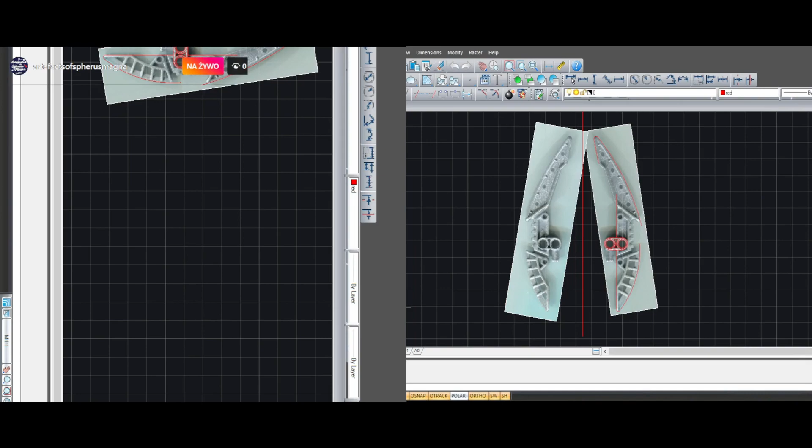Hello everybody. For today's stream I have planned to model this Takanuva part that you can see on screen. This time I'm a little better prepared than the last time we did a modeling stream. I have a camera setup, and when I need to show you something on the part, or if I want to show you how I take some sort of measurements directly from the part, I will be enabling the camera.

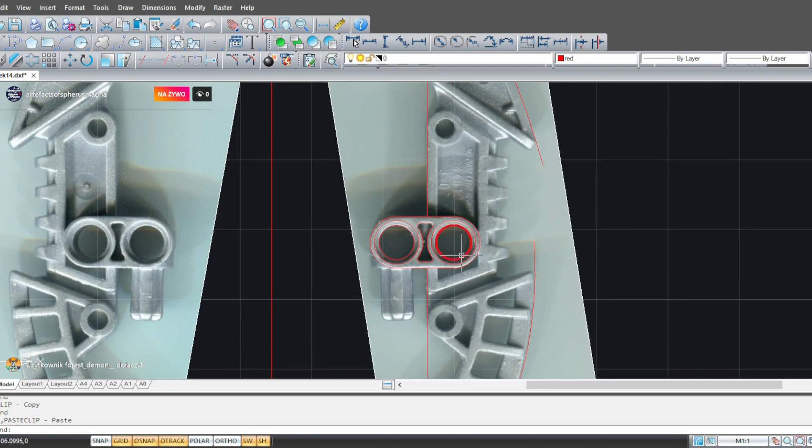Fortunately, this side came out very well. We don't have this sort of distortion. You can see that all the walls are perpendicular to the scanning glass, and we can actually use this reference. So the entire scanning process, making reference process, requires you to be very precise, very diligent, looking for this sort of things, and the perfect way is to avoid making bad references. But when you accidentally make bad references, you have to either remake it or be aware of it while drawing to not introduce some sort of error to the model you are making.

So we'll be mainly basing our reference on this scan, and using this scan only to look for some minor differences between two sides, but I don't think we will even need this side. Okay, so we know that these two lines are parallel, so we can draw this freehand like that. Okay, we have a closed profile here. Let's cut off here like that.

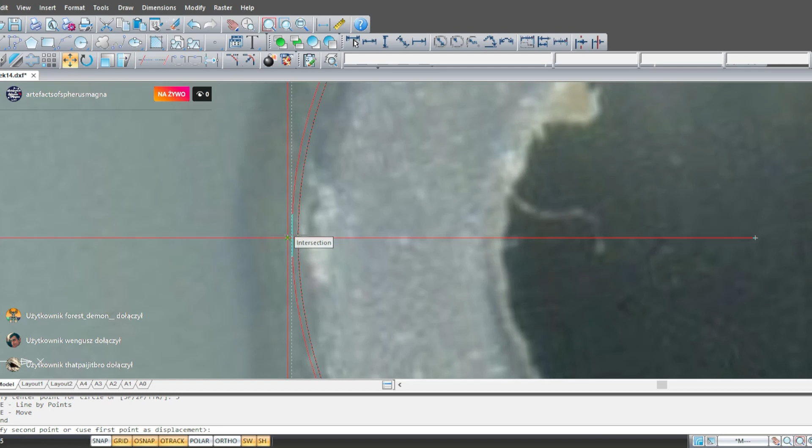First, let's measure it and find the rough position right here. Now we want the circle to be tangent with this line, so we can slightly move it. Again, doing a little hack job because of lack of commands that would let me do it the perfect way. But on this scale, this kind of precision is perfectly fine. Now we need to, okay, I think this arc will also touch off on the point where this line and also this line cross.

Actually, let me look at the part real quick. Okay, so this arc is indeed tangent to this line. It also touches off on this edge, so I was correct there. Also, I can touch off the part on some flat surface on this edge, and I can see that indeed this edge is moving away from the reference, so I can also confirm it this way. Okay, this section is a little thinner. Okay, let's get back to our program.

So let's draw this arc roughly. It goes about, actually, if we make this line first, we will have the connection point. Okay, like that.

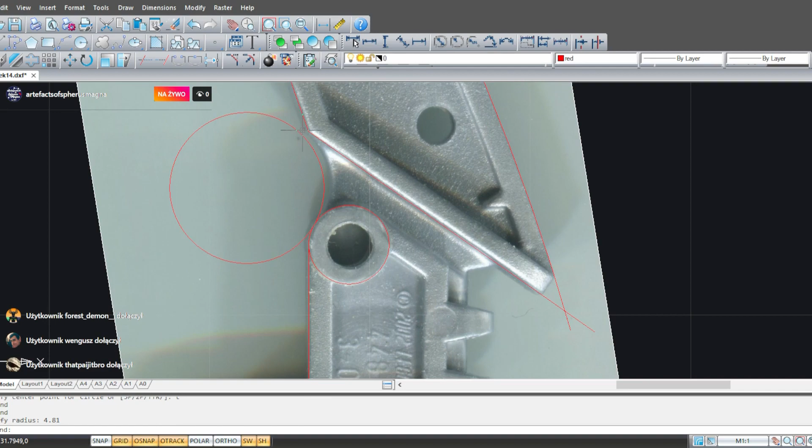It's 4.81. So let's delete it, and now do the tangent, tangent, radius circle, 4.81. Yeah, that's the problem with doing it this way. It doesn't always work. How to do this? Good thing that this arc isn't in tangent with this line, because then it would be an absolute nightmare. But with it going through the point, it's also pretty difficult. How to do this?

3 points, center, start angle, central angle. Start and radius would be useful here. And unfortunately, nanoCAD is sort of limited with this sort of thing. I think we will have to sort of cheat on this being tangent here. Again, on this scale and with 3D printing, it won't be even detectable.

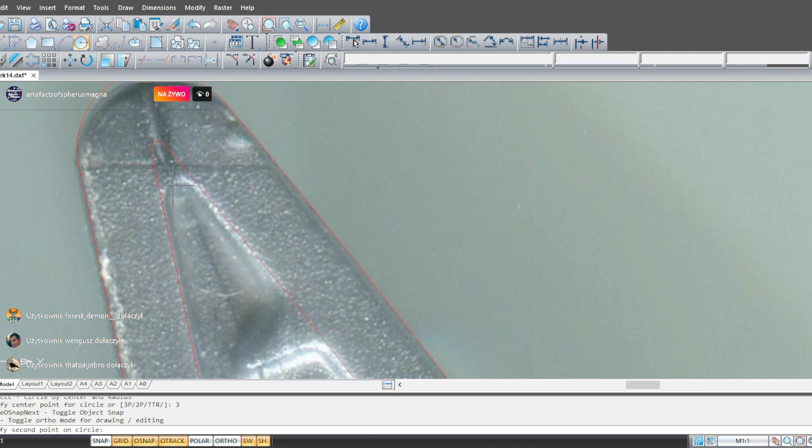What's the radius here? I can see on this background 0.4. So let's do fillet 0.4 here and here. Okay.

I also have a lamp set up for the camera, so you can see the part and the calipers, and the lamp shines on my monitor, and it makes it kind of hard to see.

Do we need some sort of radius here? Not really. So we can leave it as is. Cut off here. Actually, this stays. Okay.

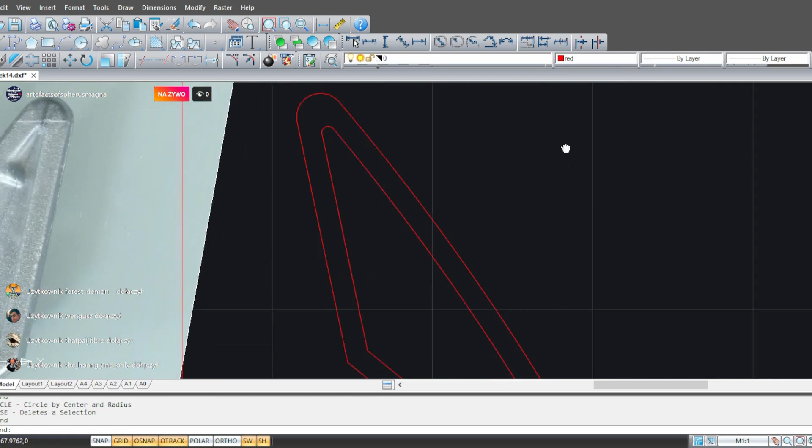AutoCAD had this sort of thing that when I moved the view, I think it was because of the memory running out, the picture would vanish, and I would see only the lines as long as I drag it from side to side. And it was really useful to see the lines without the background reference. So it was sort of a bug, but I learned to use it to actually check if all the areas are outlined and if I have everything. The only way to do this in this program is to delete the picture and then go back.

So we have to do the teeth and the holes in this blade. I will be skipping the ejection ports from the molds, so let's maybe do the holes first. Are they on some sort of a curve? Those three look like they are. I don't know about this one. Maybe let's see. Center. Oh, it actually worked. Interesting.

Okay, so they are on the arc that is concentric with this edge of the blade. Okay, so we just need to pick up the radius of this arc, and we will do this by finding the center of this first circle. Okay, right here, center of this, like that.

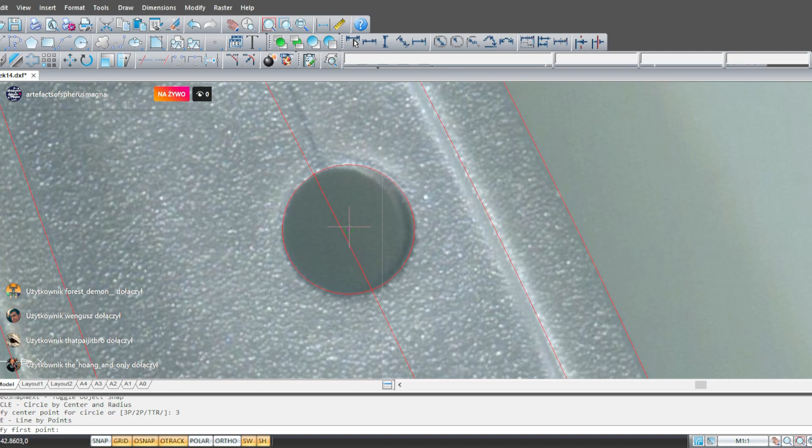We are interested in the circle in the center only, and we don't need the diameter of this hole. So let's find first the center of our arc, and now we have a point where those two cross. We don't need these two. Now if we take this circle, ensuring that they are both the same diameter, we can move this here.

Now we know that the angle between these two is twice as much as we need the angle between every object in this array to be. So we can cheat with, again, finding circle center.

Center. So here, center. Here, and now if we find the center point between these two, we don't need this, we extend this, and now we have our third position for our object. So we move this here with only 4 holes being there.

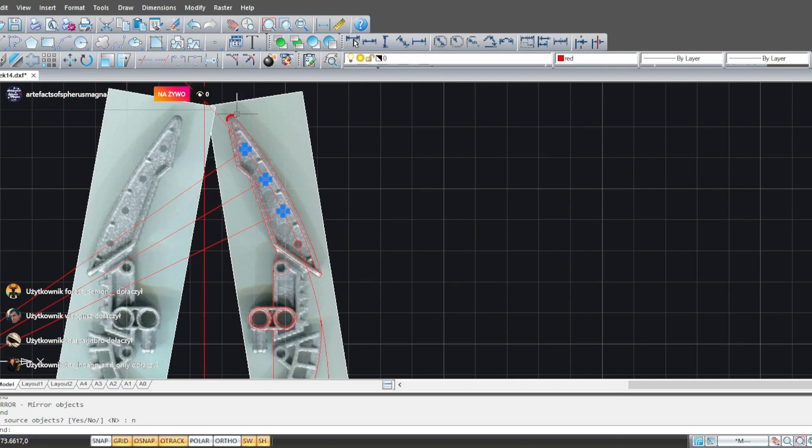On the same arc. So with this method, once it's all set up, we can draw a lot of the objects in the array pretty quickly. But we are done with this array, so we can delete all this helping geometry.

Wait a minute, let's back up, because the teeth are also on this arc, and they look to be in between those circles. So we can use the previous array to make this a little easier. Let's see.

Okay, what shape are they? There's a triangle with a rounded off tip. Looks like those sides are straight. There's a little fillet here, but I don't think I'll be drawing it. Maybe I will, let's just see. Okay, so let's start with one side.

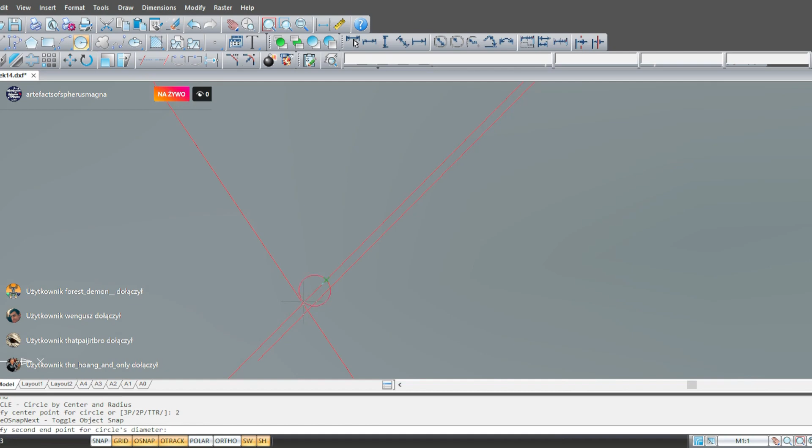It's genuinely amazing. Oh come on, why can't you? Oh okay, I see what's happening here. What? Stupid program.

Maybe like that, from here to here. What was it? It's 0.00, I'm looking here at this value. It's 0.0008 millimeters, so it's 0.8 of a micron. It's amazing. Okay, so I won't be actually finding the difference between them, I'm going to treat them as the same line.

For reference, for those who are unaware, I think the thickness of human hair is a few microns, or actually let me Google that real quick. Thickness of human hair: 70 microns, so 0.07 millimeters. And we got 0.8 of a micron. So 70 divided by 0.8: the distance between those two lines was 87 times smaller than a human hair.

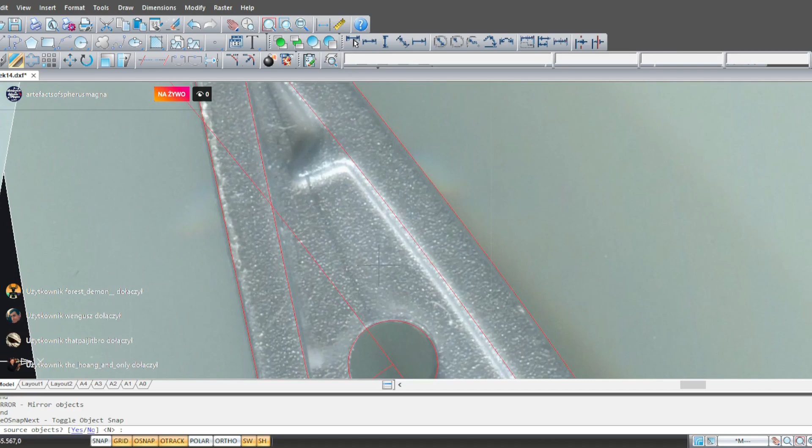Okay, so with this tooth being drawn, now I can actually show you the mirroring of the objects. So we take this tooth and now we can mirror it just like that, and it's in place. And now we can choose this tooth, and we can mirror them both on this line. And now already we have 4 teeth. There's only one more to go.

And to get it, we need to draw some more mirror lines. Maybe let's do it like this.

So it's a method, you could use the array command. There's a rectangular array, there's a polar array. So for some people it might be easier this way, but I like this method. It takes a while to set up, but when it's actually already set up, it's pretty easy to make a lot of new objects with it.

And now again, mirror, and our last tooth is in place. Okay, so now we can get rid of all this geometry.

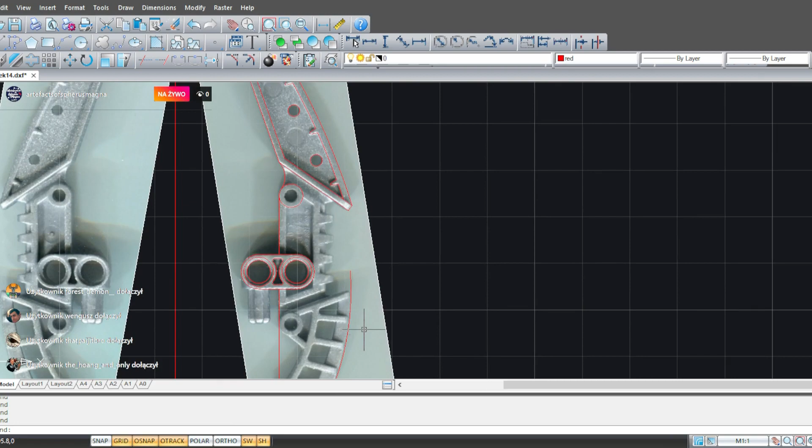The shop being closed for so long - the backstory was I got a new job that required me to move a long distance to the other side of the country. That meant I had to leave all my tools behind. I had to close my workshop, my place where I made all the parts and worked on my projects. The hope was that I would close the shop temporarily, move to the other side of the country, and when I started the job, I would slowly bring my tools, set up everything again, and the shop would be closed only for some time until I settle down in the new place and open it back up.

And I was expecting for it to be only a few months. So I expected that with the start of this year, I would reopen the shop, and everything would be back to the way it was before.

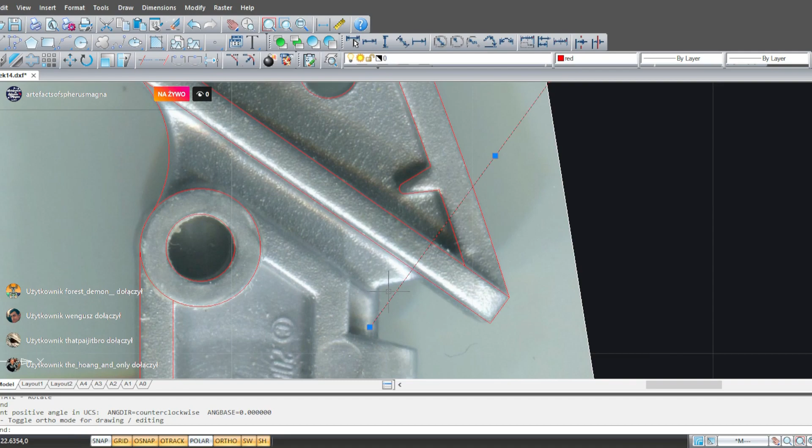But I'm not giving up on it. I plan to open the shop again when the situation lets me. So if you are still waiting for some of the parts I made, please be patient. I will be opening the shop sooner or later. Unfortunately, right now I can't predict when it will be. I can't promise you anything, but I implore you to be patient, and I want to let you know that I also want to open the shop as soon as possible.

So this is kind of how the situation looks and was with the shop, which is also related to my activity on the account, with not as many projects being made, not as many posts.

I didn't develop any new parts this year, and April is already coming to a close, so it's been some time. Like I said, this new job requires a lot of time, so I've been kind of busy. I was posting some stuff to the other account, the non-Bionicle related account. I made a few small planes since the start of the year.

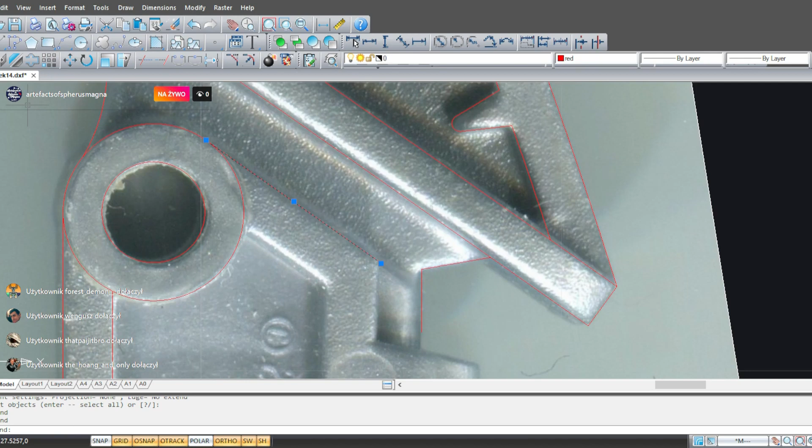I was kind of busy with some personal stuff, that's why I didn't post so much Bionicle content. Also, this new job is a creative job, so it requires a pretty high level of creativity on a daily basis. With this new job, I'm kind of drained creatively, and when I go back home, I don't feel this big urge anymore to create new stuff.

So there's also this aspect of it that not only I haven't got - why doesn't it work? Oh, okay - I both haven't got a lot of time to do new parts and new Bionicle content, but also it's kind of hard for me, in addition to being creative in this new job and meeting some of the deadlines and requirements.

Which, when you do creative work, can be really draining, because whether you like it or not, whether you have a good mood and want to do creative stuff, it doesn't matter. You have to, because you are getting paid for it. So definitely there's also this aspect that I've been kind of drained.

Sounds kind of bad, but definitely my creative needs were met with this new challenge, that is this new job. So when I go back home, I don't have so much creative needs as I used to before.

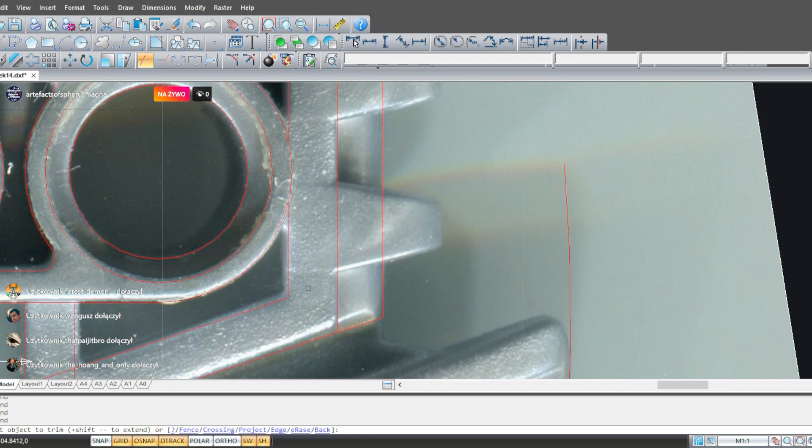So for the last month, every day I used to come back home and had to work on this diorama to meet this deadline of my father's birthday. So it also was kind of draining creatively, and the matter of the fact is that I don't have this sort of need as I used to, to creatively make new projects.

I find it pretty hard to find time and basically work on these projects, put effort into them. I would much rather spend some free time on some other things. So that's kind of how everything has been looking behind the scenes.

So yeah, I'm pretty sure that it's not really good news for fans of my work, for people who want to see my work, to let them know that I'm not doing it, and I probably won't be doing it as much going forward. I realize that it's probably not what you want to hear, but I also wanted to be clear that that's kind of how things go in life, and that's kind of the reality of the situation.

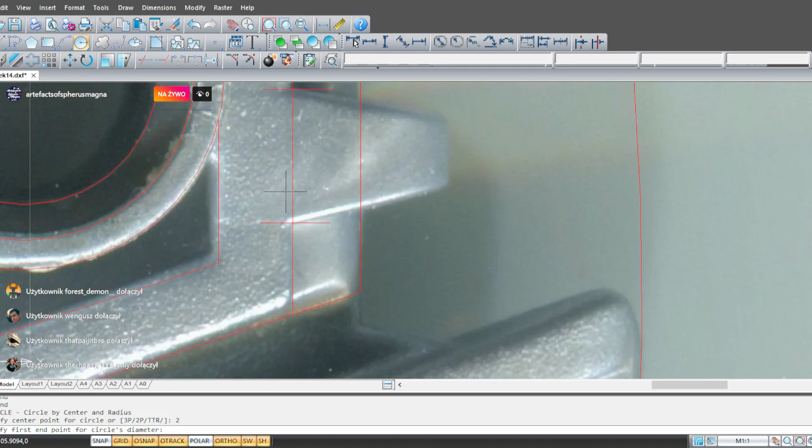Unfortunately, with these two things, this hobby and the full-time job, the full-time job is more important, and with those two things clashing, I unfortunately have to choose the full-time job. So this is how it looks. I would love to do this entire project, both Bionicle related and all the other stuff, full time, and be able to pay bills with it, but it's not something that I can do right now. Unfortunately, this is how the situation looks, and that's the explanation of what's been happening recently.

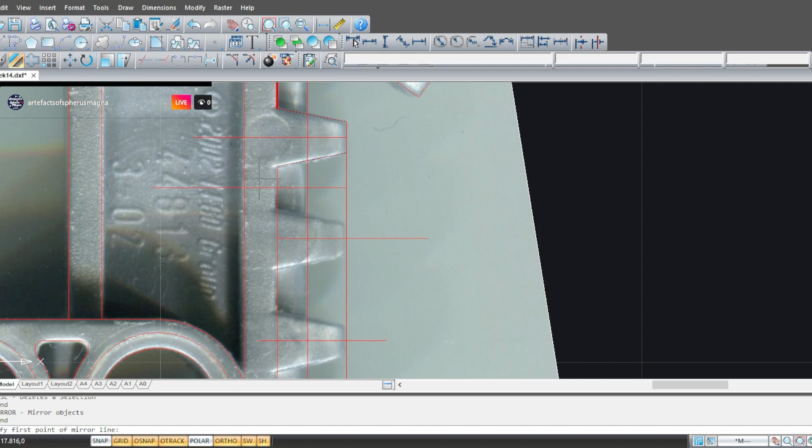Now to copy the first object, we can find a mirror line between the first one and the next one, like that. There we go. Here and here, so here is our center line. Let's keep it marked for later. This and this mirrors on this line, and there it is.

We could find a mirror line between these two and mirror this one, but between the first and third, the second one is already a mirror line, so we can use it to mirror the first appearance of the object. Here we have first, second, third. Now we just need the fourth one, and again we could find the line here, but we can use this line. This and this mirrors to... it didn't work again. This and this mirror here, here, no, and it worked out fine.

Now we can get rid of all the helping geometry. I think we messed something up here. This one looks fine, this one looks fine, and this one looks fine, so the fourth one for whatever reason didn't work out. I misclicked somewhere, it's very likely, so let's remake it very quickly.

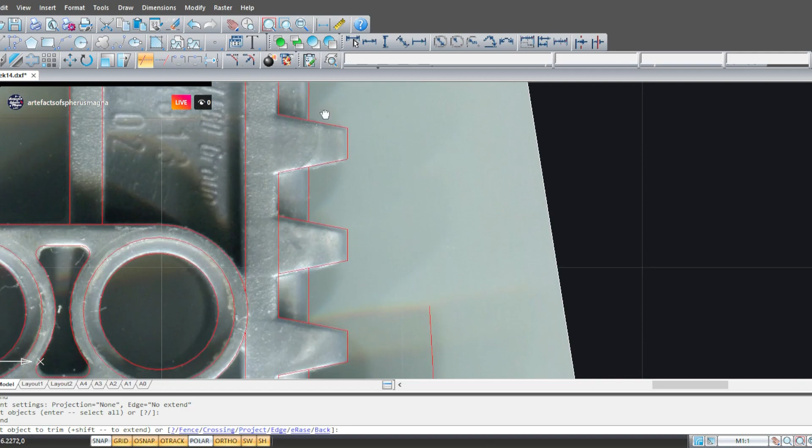Also, talking about some other topic while working proved to be a lot harder than I imagined. So if I want to focus on the work, I really need to focus on it. Doing one thing and talking about another on the stream is a lot harder than I thought it would be, and I think I need a lot more practice to make it work. So for now let's focus on the part.

Okay, how does this corner look on the part? Let us have a quick look. It is actually this sharp. Let me get a pointer. It's right here, and this line is actually rounded over, and this line is straight.

So you could have some fillet here, but it would be a very complex surface that would wrap around the round-off here. So it's pretty understandable that they didn't do it this way, so we can leave it sharp. It's the same way here. I noticed a moment ago that this region is pretty dark on the reference, so I'm making sure I know how it looks there. Also, this circle is raised here, so we need those two lines left there.

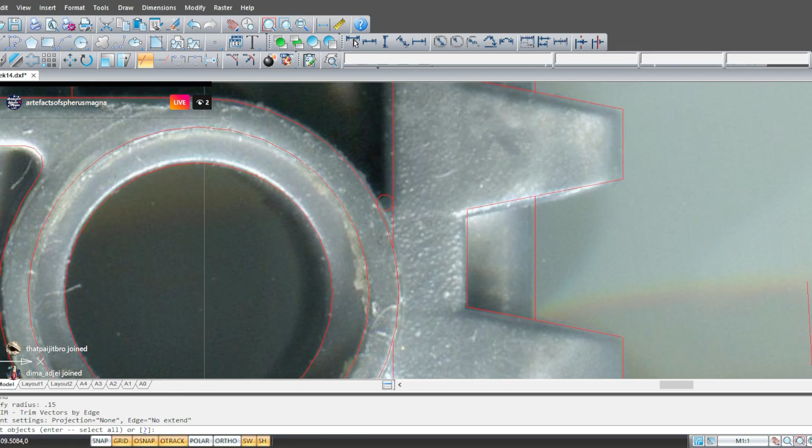Let's do this with 3 point. Let's measure it first. Around, let's maybe say here, here, like that. 0.15. Let's maybe do this TTR. Here, 0.15. Okay. So definitely don't need this, and don't need this. And this, because it's raised, stays.

Okay, we also need 0.15 here. So again, TTR, here, 0.15. Cut off this and this.

Okay. Man, that's one dirty part. But don't be so grossed out. I think this is some epoxy putty. It has a pretty disgusting color, but it's not any sort of gunk. I vaguely remember trying to cast this part with some putty or enhance it or modify it. I'm not really sure, but it's just plastic that has this pretty ugly color.

Okay, how does this look here? This is a sharp corner. Okay, so this stays like this. We actually can see the corner here. So let's pick this up. Actually, I'm curious. Those two angles look like they are mirrored. So let's maybe try using this already existing line. Again, it doesn't really matter. No one will even be able to measure it, but just to make things consistent for our own peace of mind.

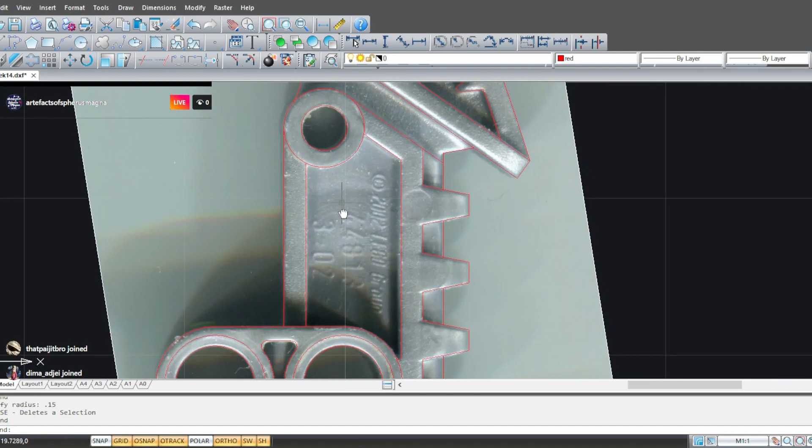What was the radius? We did some radius, but I don't remember here. No. Oh, at the tips. What was it here? 0.23. So let's maybe try this. TTR. I keep saying TTR and I'm not sure if I explained it. So let me just finish this real quick.

There are a few different ways you can specify any sort of geometry, but specifically circles. The most standard way is circle by center and radius. So you pick 2 points. The first one is the center of your circle, and the other one will be at the perimeter of the circle, and the distance between those two will determine the radius.

So like this. The other way, you can see it here, draw circle, center radius, there's also diameter. So it's pretty similar. The first point is center, but the second one, oh no, so this is 2 point. The weird thing in this program is you have some commands here, you have some commands here, and they don't really match up by name, and there are some commands here that aren't in here, so it's pretty weird.

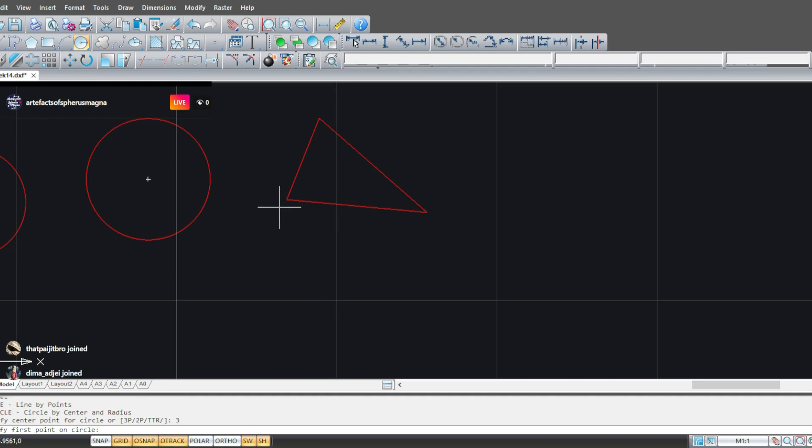So here, for example, here and here. It might look a little wacky, but it actually gets pretty simple if you realize that you are just specifying a circle that's circumscribed around a triangle. So here, here, and here. It's pretty basic geometry.

And the last one, the one that I keep mentioning, is TTR, which stands for tangent tangent radius. We need 2 lines to specify this circle. When I choose circle and type the full command TTR, or just the start T, I need to specify 2 tangent lines, so this one, and now I specify radius. I can either type in the radius or pick it up from the drawing. So I can, for example, say that the radius is this long and the circle appears.

And to really show you how it works, I will do this one more time. TTR, use the same tangent lines, but now I will make the radius smaller. And you can see that the new circle is again tangent to those lines, but because the diameter of the circle is smaller, it's in a different position.

So you can see that there are 5 different ways to draw a circle. There are also arcs, which kind of work like a circle, or you can start with a circle and then convert it into an arc. The other way around, I think, is pretty difficult, because even if you close an arc, I don't think it becomes a circle. I think it's always an arc, even if you connect those 2 points.

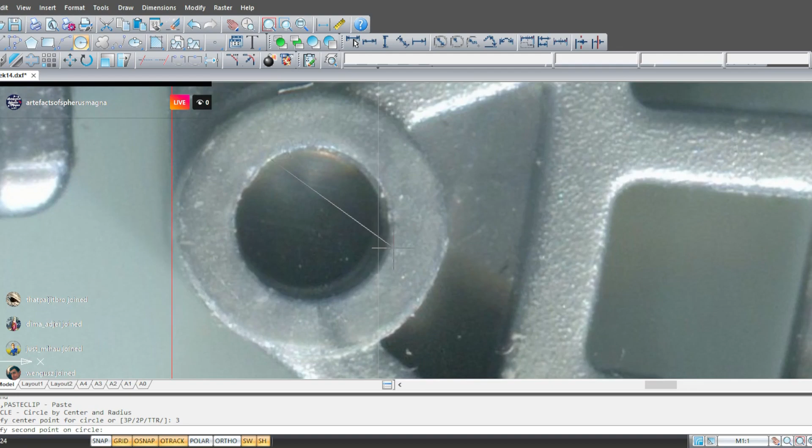Okay, back to the drawing. Those 2 circles, this one and this one, look pretty similar. Let's see if they are the same. They are, so we can use those, but first we need to find the exact center. We do that with 3-point. So let's say about here, here, and maybe here. We have our center. We don't want the circle here, we only care about the center. Now we can move our 2 circles into the perfect place.

Don't need this. Okay, what is this shadow here? Let me look at the part. Oh, come on. Zoom... it's this place here, and there is no additional line or wall here. I'm not sure what that is in our scan, I think it's just a reflection. Okay, no idea what happened there.

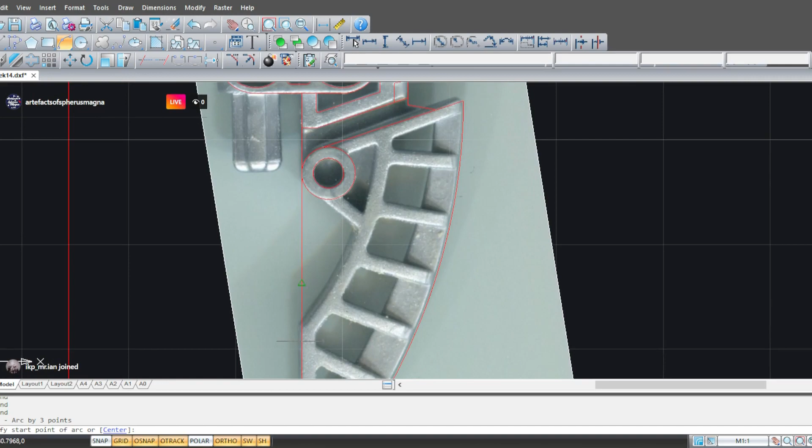Okay, what was the offset? Maybe let's do the outline first and let's do the offset later. Okay, I think this will be smarter, so we can do this arc here, here, and let's say here, like that, and this can end here. Okay, so we can extend this to here. Now we can cut off this line.

Okay. Also we need a line that's tangent to the circle around here. Okay. Maybe let's do the offset here.

Oh, it looks like it drops off, so they aren't really concentric. We have to do this freehand. Okay, like that.

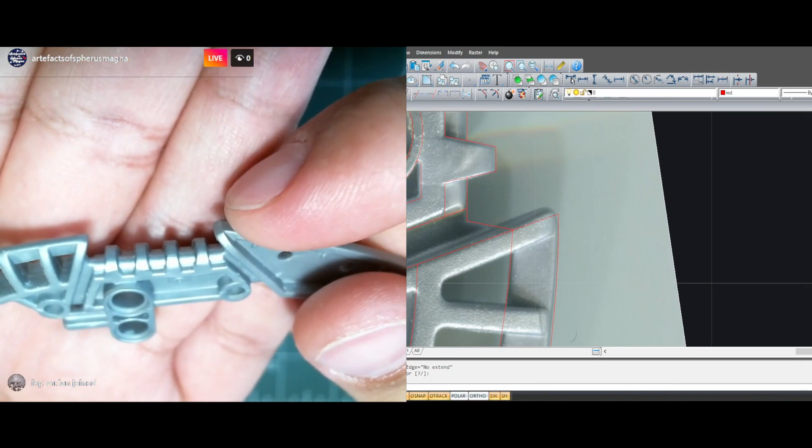Can we do some offsets now? I wonder if we should round this off here. I'm looking at the part. Let's see. It's this corner. I think we can do a little... or no, it's the same as it is here. There's a flat that's parallel to the longer line.

Okay, so no fillet, but there's a... wait, where was it? Here, yeah, you can actually see that it should be the same way as it is here. It's a little less visible, but that's how it's supposed to look. So this will go around here, like that.

Okay, we can do at least some offsets now. Okay, so the offset was from here to here, and we can offset this to here, this to here, this to here, this to here, and let's skip the ribs for now. Okay, so I think that's all.

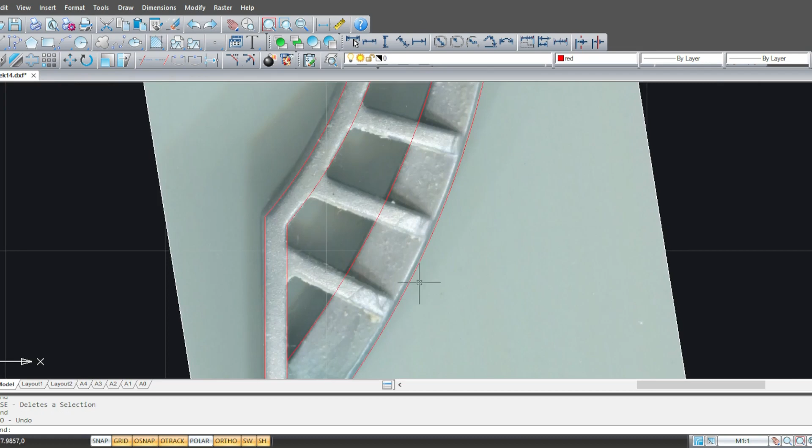Let's cut off the excess. This, and this. We kind of fell out of the part a little right here. Again, this could be caused by the distortion with the scanning. The part might have rotated a bit. Okay. Everything. Oh, here we have some weird thing to address. Okay. Oh, so we just need to extend this like that. Now we just need to add the ribs and we will be good to go.

Okay, do the ribs all point to the center of this arc? Something didn't work. Let's try this again. Center of this. Kind of, but not, no, not really. But maybe to the center of this arc, because as you may remember, they are not concentric. Center, let's see. It's not a lot better. It's a little tilted.

But maybe to this arc. No, definitely not. Okay, so it looks like they are independent of those arcs. So we can draw them freehand and find our center by ourselves.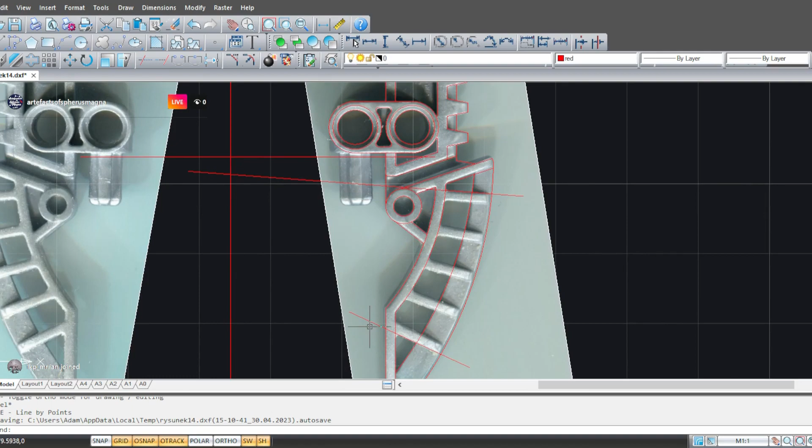Instagram is acting up again. Give me a moment. Jesus, I hate this platform. There's nothing worse than Instagram. What a piece of shit. God damn it. What a piece of shit platform. Okay. If anybody knows a better streaming platform where there are no problems entering, like Twitch or some other platforms, where you don't need a big number of subscribers like you do on YouTube, one that's easy to get onto and easy to stream on, please recommend something to me. Please let me know, because I can't deal with this piece of shit platform. Fucking Instagram. God damn it.

Okay, anyway, here's the center of our arc that all the ribs are based on, that are spaced on this arc. So it looks something like this. You can see that it doesn't match any of the arcs that we have so far. So we actually did have to do it this way. What is this? Why do we need this? Go away. Okay, so now 1, 2, 3, 4, 5 ribs.

Okay, so now I remember that we need an odd number, so we can do the first one and the last one, and this will be all that we need to fill all the, what do you call it, all the ribs in between. But actually, right, those two lines were only used to find the center of the circle, but they aren't actually at the same angle as the sides of the ribs, because sides are supposed to be parallel to each other.

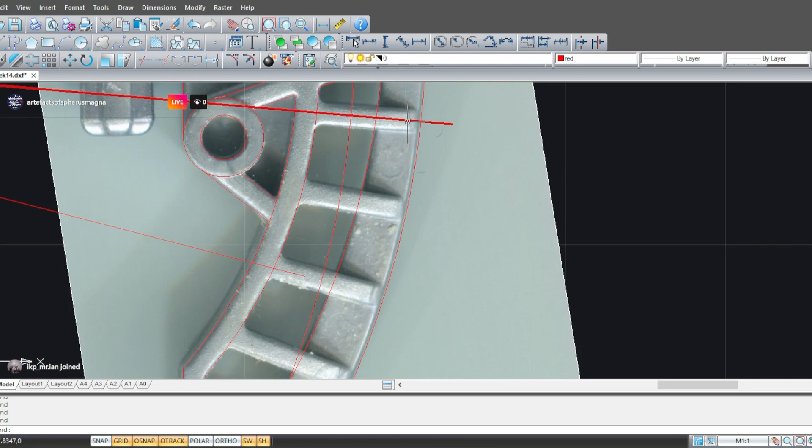Now we have the center of this rib. If we mirror it to this line, oh, I think so. No, it went okay. I think something went wrong, but everything works out. Okay, so now we have the center lines of the three ribs, the ones at the ends and the center one. And now we need to draw the sides of the ribs, which are parallel to the center line. So let's freehand it. Let's do one like this. Let's pick up the same angle and just find the distance. It's about here. Now let's split the difference. Again, they are very, very close.

Now we can mirror this one. Okay, and we have our first rib. Let's extend this a little. And now we can mirror those two lines through this line. And we have our end rib, the last one. Now if we find a center between those two, we can mirror those two lines on this line, and we have one more rib.

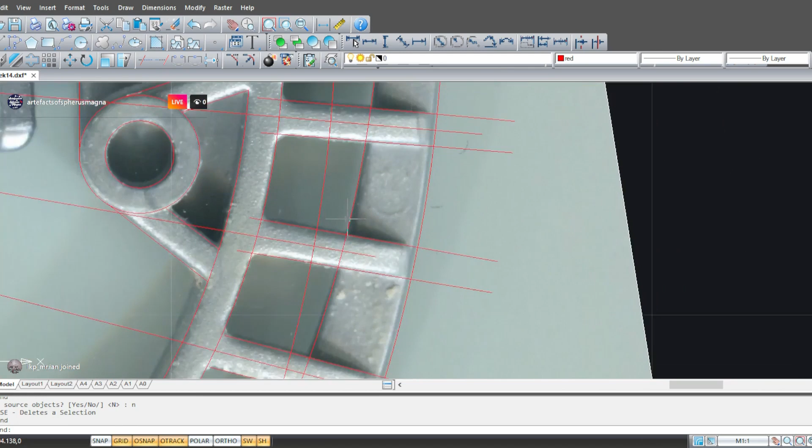Okay, and now we can mirror this line on this line. Wait, did I mess that up? No, because we can find the center line between those two. And now mirror these two. I know it looks a little crazy with all the different lines, but if you actually sit and do this method 100 times, it actually becomes pretty clear and pretty logical.

Okay, now we have all the ribs, so we can get rid of all that. Don't need this. Now let's do the trimming. Okay, the lines don't cross here, they crossed here, so we need to extend them here, like that, here and here. We can do some more trimming.

Let me turn on the camera. I'm looking at this place, if we should leave this line here, let me see. They are smooth, but because this region is flat and this one curves down, we actually need this line here to cut off these two regions, even though there is no tooth here, it's all flat. So let's leave it in place. It will make things easier on us later.

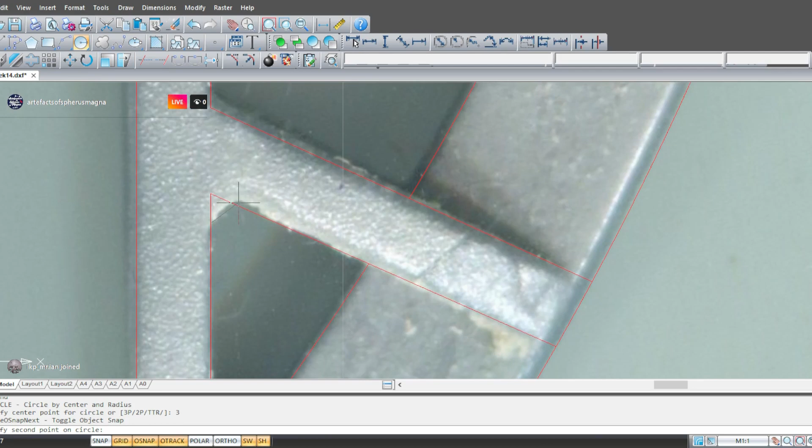Okay, we can get rid of that. Now we need to do some fillets here and there, and we will be done. Okay, here's a nice big area we can measure around here, and it is 45. Let's do 0.45. 0.45. Like that. Here. Here. Here. Those angles stay sharp.

Like that. Oh, messed it up. But also here, but yeah, the radius here is smaller. So let's fix that real quick. Okay, and let's try 0.15. Yeah, it looks okay. Maybe here. We could do one here and one here, but how does it look here? I think those are the equivalent one. Okay, so let's do them on both sides. So here and here. I lost it. Again, here, here. Here we are already done. Oh, we lost an arc here.

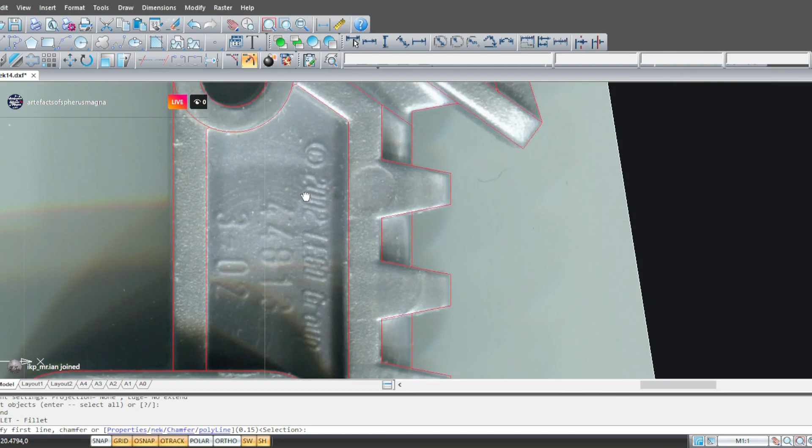The radius tool, the fillet command, I talked about it last time. Sometimes it cuts off, sometimes it doesn't. You can actually change it here. It's the scissoring. I don't know, it's not a command, but aspect. Oh, aspect is a good word. Aspect of the command, and sometimes you tell it to cut off and it does. Sometimes you tell it to cut off and it doesn't. Sometimes it works the other way around. So I explained last time that I sometimes get weird results with this command.

Okay, I think that's all. Let me quickly check without the picture. I think we are done.

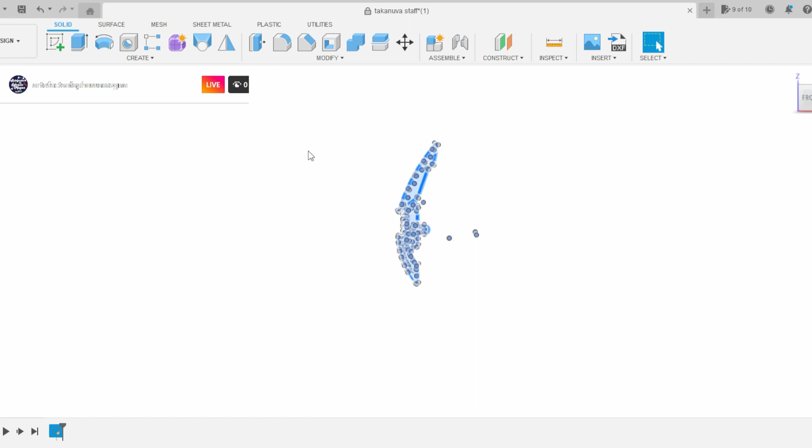I haven't used Fusion in a few months. I actually do 3D modeling in this new job I mentioned, but we use SolidWorks there. So for a few months I've been using exclusively SolidWorks. It's a really great program. You can do a lot of cool stuff there, very professional with many different options. But the downside is that it has some different controls and different commands. Well, basically the same, but they are called differently. So now going back to this Fusion Inventor environment, I'm kind of lost. So give me a moment to readjust.

Where's the move command? Modify. Why can't I move it? Was it M? Yes. Point to point. There we go. Okay. Now let's mirror it. Where's the mirror command? Come on. Not this one. Yeah, that's exactly what I'm talking about. I'm a little lost. Origin, I think. No, that's not what we want. Damn it.

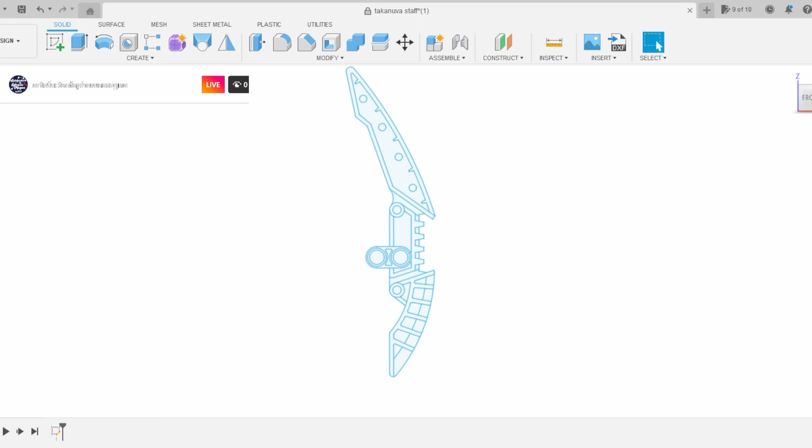I'm going to open my dimensions. Okay. Let's save our progress. Whatever. Okay, so now let's turn on the camera. Here's our part and how I want to approach it.

I think I will do this the same way I did last time, which is to create the most complicated and difficult geometry first. There's this slope that goes down, but has a changing radius. It's not just a sweep, because the length here is much larger than here, and this is all a smooth surface that goes like that, and there are some holes punched through it. So first we need to create this smooth surface, and then we can punch out the holes, which will be the easy part. We have those round-offs here, which could be again made in a few different ways.

I think I will extrude them from here to here, so we have the rounding off done already. Then I think I will punch out this hole this way. You could also extrude it this way up and then add these round-offs, but I think extruding them in this direction will be a little easier. All of this stuff can be extruded, it's pretty easy. And this blade, let's see.

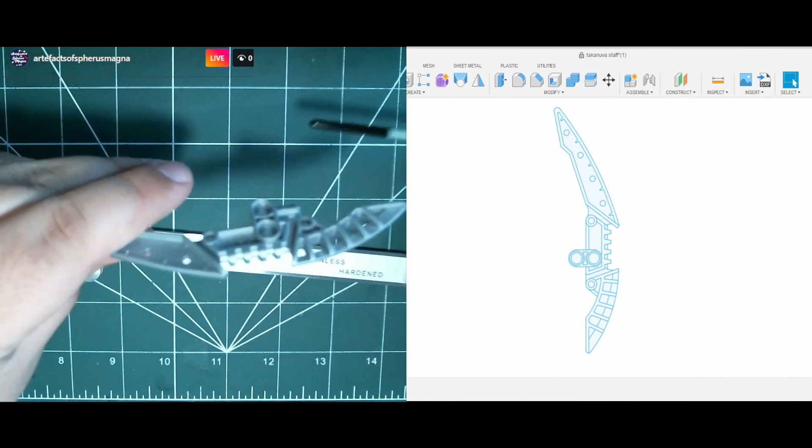It's not actually the same situation as it is here. It's not one smooth surface that has this big cutout in the middle. It looks like this long backside is actually straight.

Yes, it is. This one is also straight. There's a little rounding off here on both sides, and this basically cutting edge of the blade is all one thickness.

That's why they don't meet here. You have this head cutout here. That's because it's not the same geometry as here. There we have one smooth surface, and this is something completely different.

So this will be a little easier to make than that. Well, less complicated. It might actually give us more problems, so not sure if it will be easier or harder, but the commands used to do this part will be a lot easier.

I think I want to do this back blade first, with a loft. Then I want to do this front blade, then I might do a sweep, and then I'll fill out this middle section with extrusions of all those pretty easy sections. Okay, so that's a good plan.

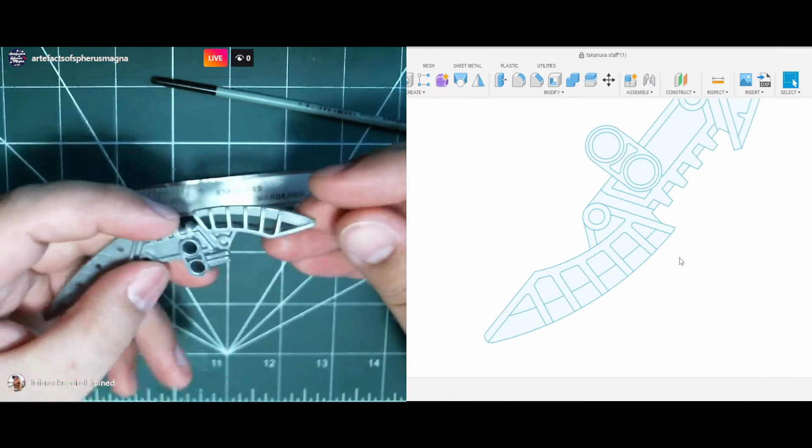Let's see, there's this sloping off. We have a nice clear profile here. This is all one thickness, which we can pick up from the part. And here is a little different profile than there, because here it slopes off from the very beginning, and here we have some flat section and then it slopes off.

So I think we can do this profile, maybe add some rails here and here. Maybe we'll get away with 3 rails, one here, here, and one in the middle. Or I think we don't need to risk it. We can.

Yeah, because this profile here has this little flat. That's where you get this. Is it? No, it actually isn't. Okay, so we'll have only one rail here in the middle, because we don't have a flat here, it's rounded off.

The radius here kind of makes it hard to see. Okay, so we need this profile, 3 rails, and I think it will work out fine.

Okay, so first we need a nice plane, right here, like that. We'll also need all the places where the lines meet, so let's do this with a point.

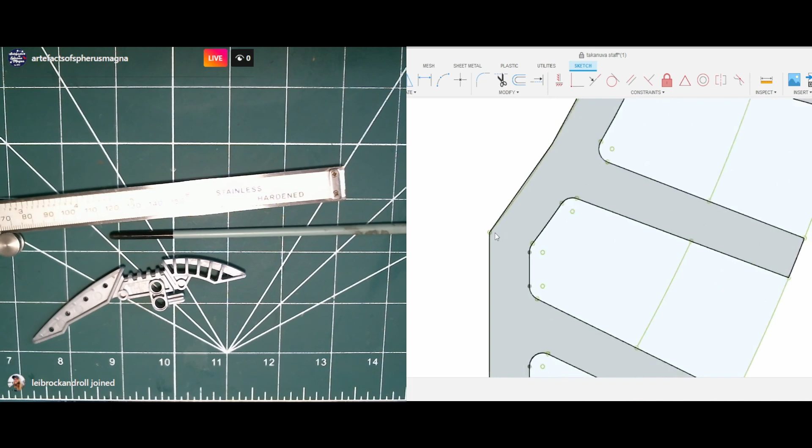Now, so we need to do this here. And again here, this, here, and here. And we need another one here, on this line and this line.

There are some points that will help us pick out those intersection points, which we'll use to reference our profiles. Okay.

So again, looking at the part, we have a straight line here. Then we have maybe like that, a circle here, and an arc, one on this side, one on this side. This is tangent to this, this is tangent to that.

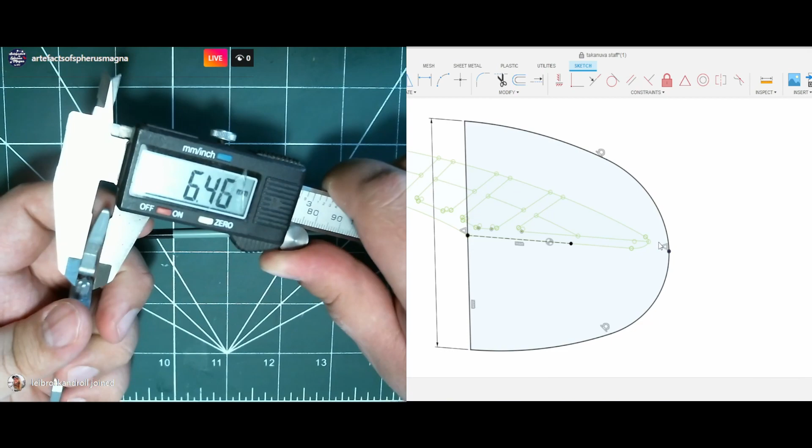Let's do 5, maybe 5.5. Yeah, 5.5. Okay. Something didn't work here. Or did it actually? Where's our point? Oh okay, so like this.

And we need to pick up this dimension here, and roughly it is, well let's do this, 1.45. So this is how this profile looks. Okay, this one is done.

Let's do a similar one here, sketch. Again we want to make the same shape here. Maybe let's turn this off for now, so it's easier to see.

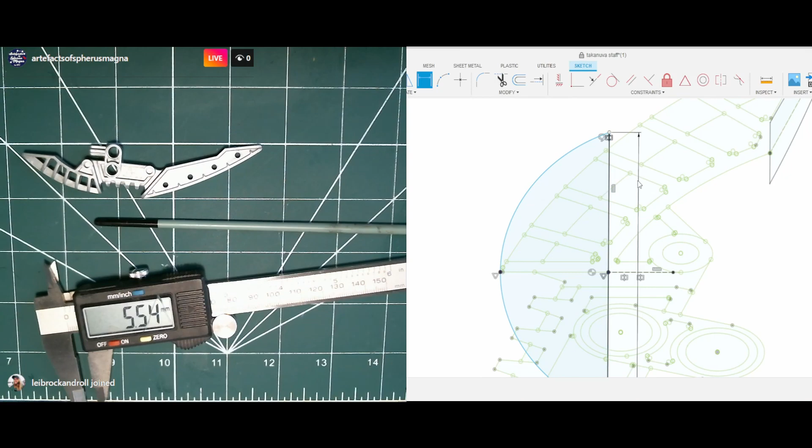So this is 5.5. Okay, let's do the end, the same dimension we did here. What was it? From here to here. 1, 4, what was it? 1, 4, 5. One, 4, 5. Okay, we have the second profile.

Now we just need to add our rails. So let's start with this one in the center, it will be the easiest to add. It's just an arc, it's tangent to this, it's concentric to this. And it meets our profiles. I think the rail can go beyond the profile. I think it will work fine, but just to be tidy, let's do it this way.

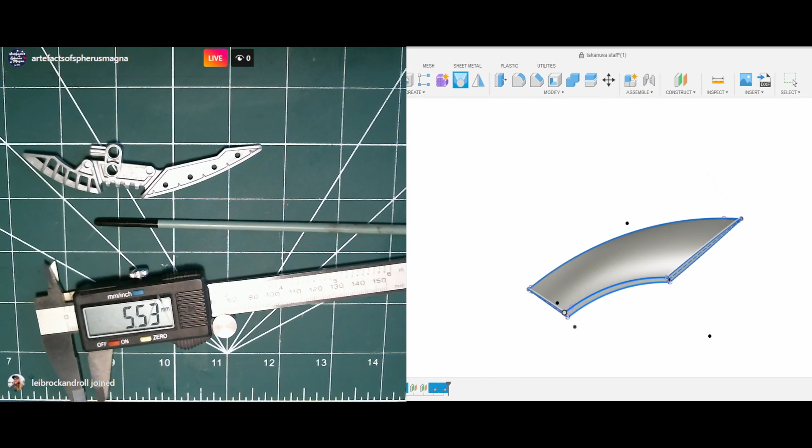Let's see, pretty nice geometry. Everything looks even, everything looks nice. Let me just see. Okay. So this worked out pretty great.

Now we need to do this cut off here and punch out all these holes. Do this cut here, I think we can do that right now. I want to modify this to make it a little easier. Like that. Also here. Okay, and now we can use it to extrude all those edges.

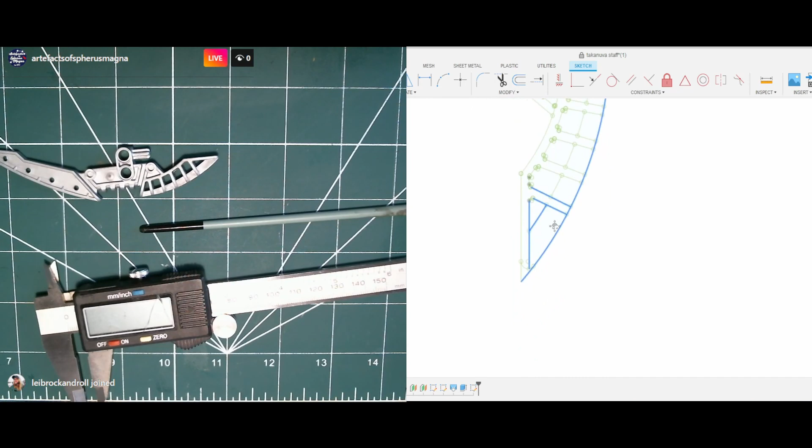Like that. Now we can cut all those places and go to the middle plane. So here do the cut, and the offset is minus this thickness, 1.5 divided by 2, like that. How does it look here? Is it this shape? It kind of is. Right here.

Now let's mirror that. Oh, not like that. But not adjust, but identical. I think it will work, and it does. Let's check the measurement, it should be 1.5. And it is. So everything worked out great.

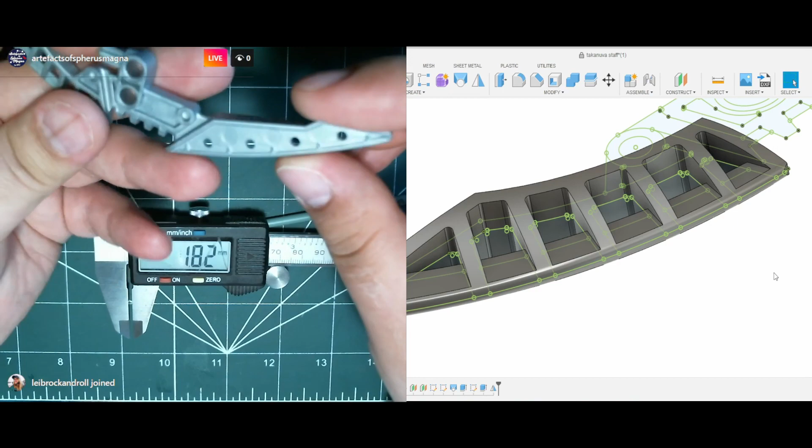Okay, I have an idea. So first, let's maybe save first of all. Okay, and now let's edit this. Let's add a line here, so we have two different. Also, let me see, we want to also cut off this like that. So we have one profile, second profile, and third profile. They are all independent now.

Okay, so now we want to extrude this one, let's say. We want to do new body, okay. New body, symmetric, and the distance is here.

Six point, 6.3, like that. Okay, and now we want to tilt this face down until we have... and does it even tilt down? It does a little.

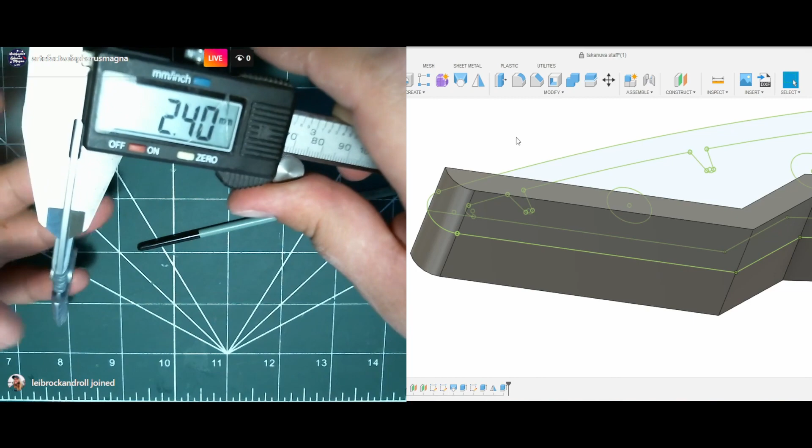Now it's 6.3 and we want it to be around to 8, or to maybe let's do to 4. Okay, so we want to, I think, move.

Let's rotate. Oh, also another thing. Okay, we need to modify it a little. This line needs to be at a different angle because we are moving, rotating from this to here. So this line needs to be parallel to this direction, because this is an axis that we rotate around.

Like that. No, he lost it. Okay, like that. And now when we tilt this face, we have nice bodies, but faces - this face, and we have a nice axis here around which we can rotate.

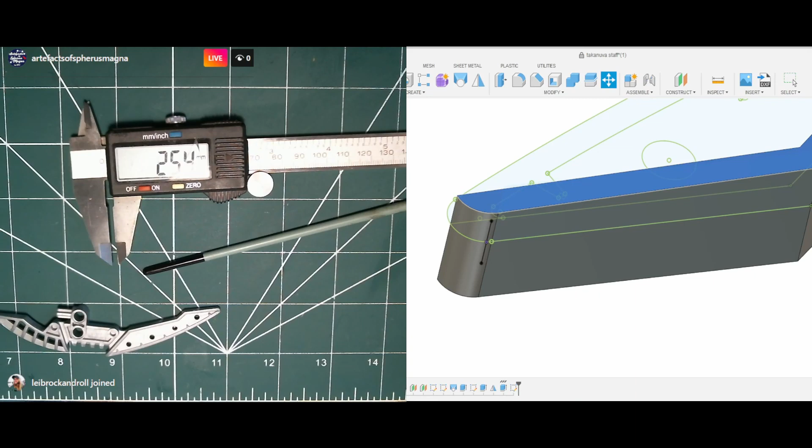Okay, and now when we rotate it, we're below the line, so 5 is way too much. Let's try 2, too little, 2.5, and that looks around okay. And this dimension actually will be here, so let's try 2.5. Let's also do the other side, -2.5. And now we can check the dimension.

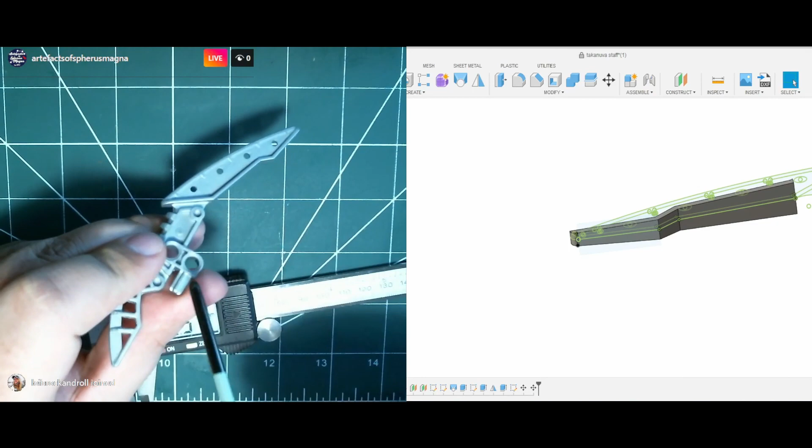So let's see how I want to do this. Maybe let's try to recreate this profile. Or actually, let's do it a different way. The difference here is that when we tilted this, we have these three walls that tilt all together. But here we have only one wall, so we can extrude it, and we can create this profile on this side and extrude it through, cut through. I think this will be better, so let's do it this way.

Okay. Let's extrude this. Distance to object, to this point. Symmetric. Join. Okay, the reason we didn't extrude both of those walls at the same time is because...

...if we would, then when we tilt this wall, this one would also rotate around this axis in the other direction - this would go down, and this would go up. So to have them both independently, we finish this one, and now we are adding this one. And even if we would want to tilt this one the same way, they are both now different faces because they are at a different angle to each other. So that's why we wanted all those three regions independent, to work with one at a time, so the things we do to one don't also affect the others.

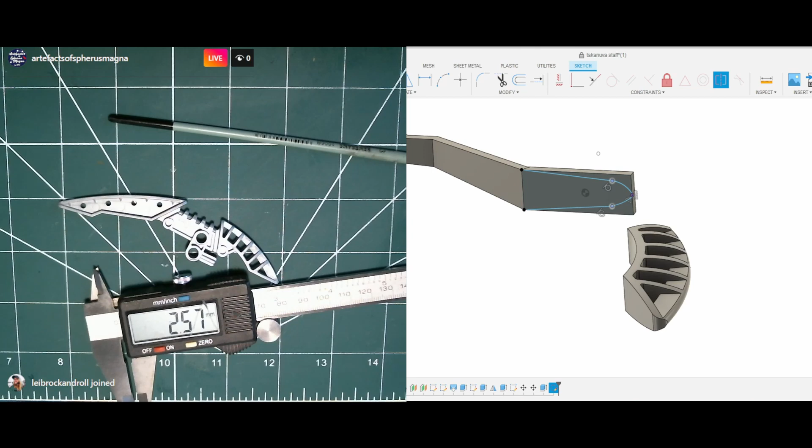That's perfect. Okay, this will be a little easier now. This and this to this, this and this to this. No, come on. What is it? Oh, it's the center. Okay, so not this one actually, I wanted this. Okay, like that, that's what I wanted.

Let's constrain everything to be sure that it won't move on us. Almost had it. Why doesn't it want to move? Oh, there we go.

Okay, and now let's do some rough measurements. This is around... trying to be as precise as I can, even though I can't pick up the perfect dimension, trying to be very precise. 2.15 will be good enough. The dimension from here to here is roughly...

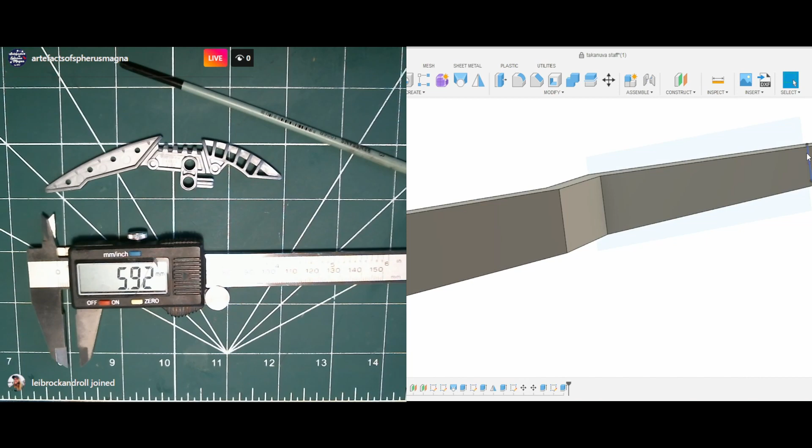And here is our profile. Now we can cut off those sections like that. Something probably... oh no, maybe not. Okay. What is that? Oh, we don't need that. Okay.

Now the last section is this, which is something with 4. I seem to remember 2.4. Let's make sure it was this one. 2.4.

Okay, so we can even do this to object to this point. Symmetric. Join. Very nice. Let's get rid of that. Delete. Delete. Very nice. Here everything met very well.

Okay, what is that? Sketch 9. What is the sketch 9 for? Did we lose something? No, I don't think so. Ah, it must have been some lost sketch made by mistake.

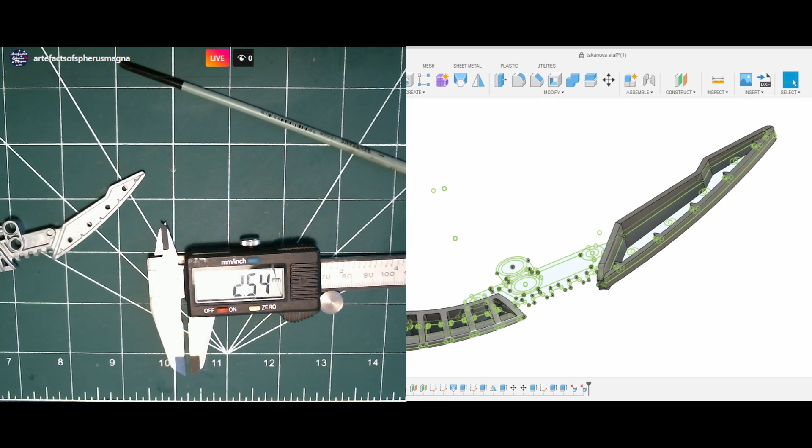Okay, looks like we are back, so let's continue. We have the perimeter around this blade and this front blade done, so let's quickly extrude this middle part.

The extrusion is pretty easy, but to find out this thickness, this dimension, will be a little bit more complex. The problem is because this blade is thicker than this middle section, we can't grab it with calipers, because if we do it like that, we keep grabbing the perimeter and not the middle section, which is thinner than the edge.

So a good way to find this out is to take dimension off with two steps. First, we can measure this thickness, which we already knew, so in the program we don't have to write anything. We can just... where was it?

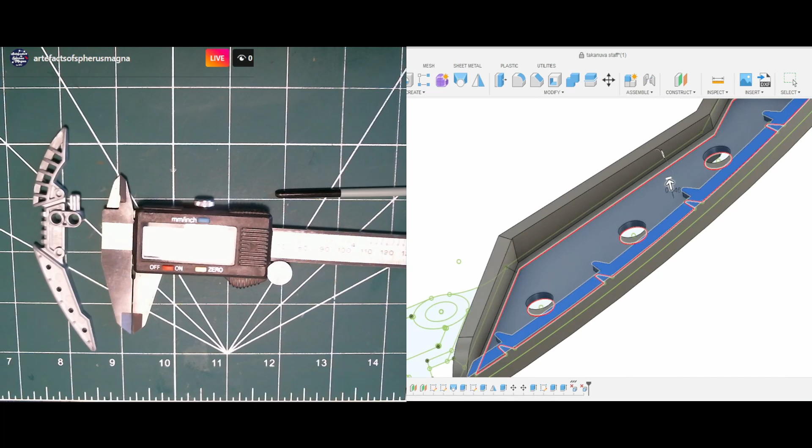No, again, we can just tell the program to extrude to this, but to start before it by 0.6 millimeters, so minus 0.6, and you can see that we are below. We also want it done to the second side, the other side, same way, like that.

Wait, what? Why 6? Why 6? 0.6. Oh, it's because of this thickness. This dimension is something wacky here because of the tilting we did. Yeah, 2, 4, 9, 2. Yeah okay, but the difference, so this to this, this to this, is our 0.6, so as we wanted.

So this front is done, pretty easy, and the only thing left to do is this middle section, which again will be pretty easy. Oh, we also have this round part here, so this section, so let's maybe do that first. And the way I want to do this would be, let's see.

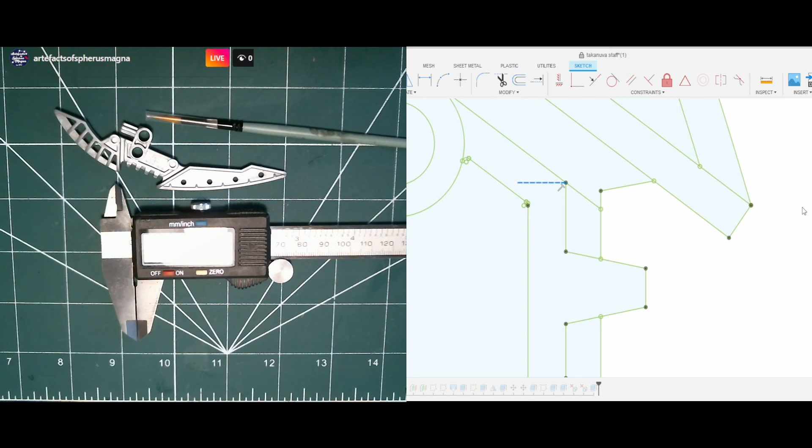Oh, the lower section, those cut-offs are also rounded off. Okay, so we want to draw those two profiles, and we need a plane that's parallel to the direction in which we will be extruding those. So let's maybe edit the sketch to not create any new sketches unnecessarily. We will start here, perpendicular. Okay, we can even make it construction so it doesn't cause any problems.

Okay, and now we can make our plane at an angle. Okay, let's make our sketch here, like that. We can hide this one for now so it's easier to see. Let's make sure I know how this profile looks.

Okay, so we have two circles, this one and this one. They are concentric. And... no. God damn it, come on. From here. Okay.

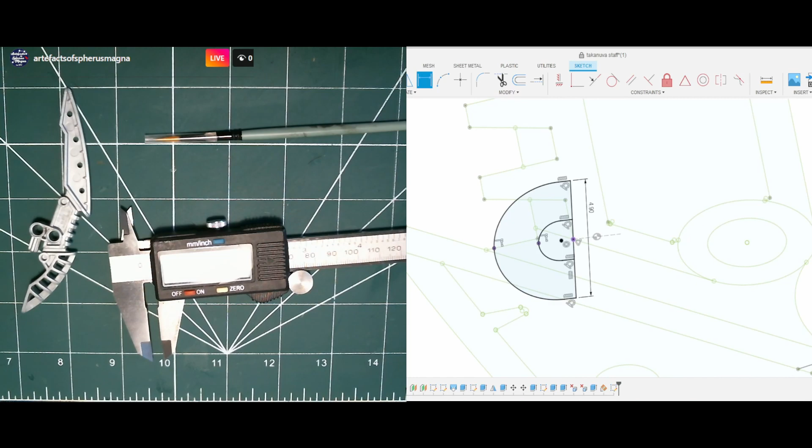Okay, so this will be our extrusion, and we start with the big one, and we extrude it right to here. I think it's like that. So no, to here. Or we can even do here, doesn't really matter. Okay, so to object, like that. Everything lines up properly.

Okay, let's edit this real quick. We want to section off this region. Now we can cut off all of this. All symmetric. Okay. Now we have the teeth cut out, and now we just need to add the middle core.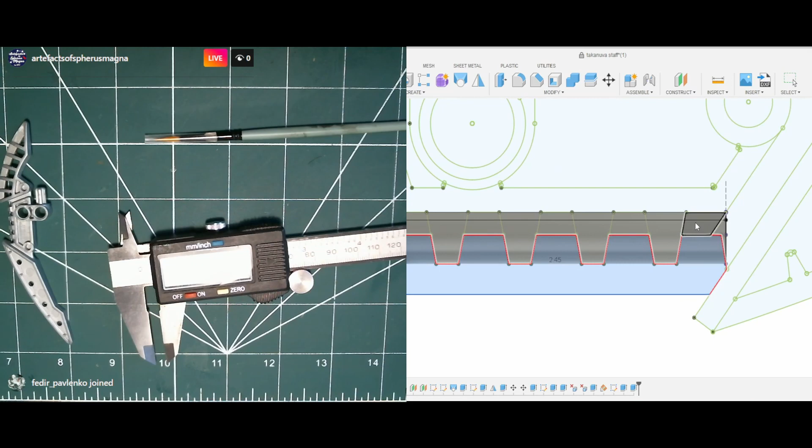Oh, I know what I did wrong. Okay. So with this, we need to cut out a little more. We also want to cut out all of these sections. Like that. And now when we extrude, yes, now it looks as it should.

Okay, let's continue. What do we have next? Okay, we can extrude this and this, but without the teeth. So we need to edit the sketch and section the teeth off. Edit sketch. We need to cut off all of that.

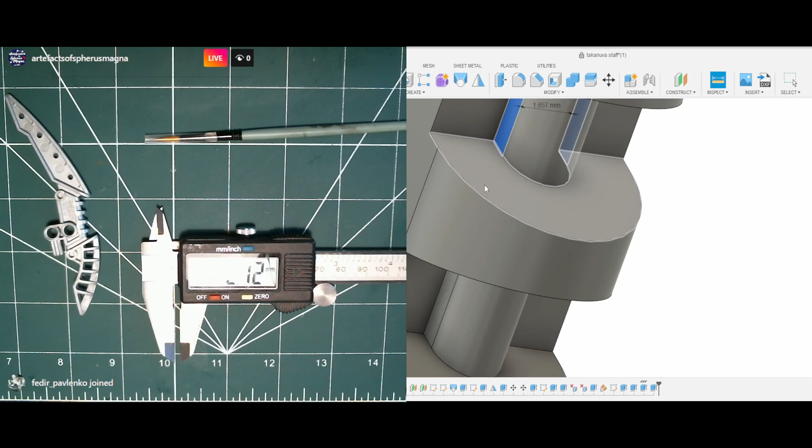The middle section looks pretty... Wait, how did I? Because it looks pretty thin. It's around 2.75. It's not an accurate measurement, but it gives us a rough idea. 1.657. So actually it's too thin. So we need to redo that.

They are not supposed to be concentric, apparently. We need to give this dimension here independently. And it's supposed to be, this might be actually a little more accurate. So let's actually put the dimension here. It's a more reliable way to measure it in this case.

1.45. On the other side the same. Yeah, they are slightly moved one to another. It looks a lot better now. It was definitely too thin. Okay, now we can move on to the circles, maybe.

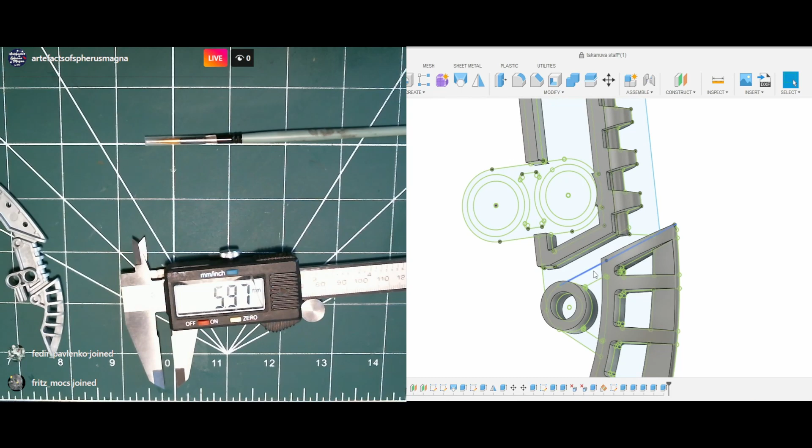Okay, how does it look here? Okay, so let's do that in a moment. Okay, so this and okay, we need to section again. Edit. We need to section this off. Will something derail? No.

So we need this and this, and because it's tangent to the surface we made earlier, we can do to this point. It will join nicely, and we want it to be symmetric like that. Okay. There's actually a way to check. It's not 100%, but it gives you a rough idea if these two planes are tangent.

And the way to do this is to turn off the edges of the model. And you actually do this here, I think. I don't change it very often. Yes, we have shaded with visible edges only, and we want only shaded. And you can see that, for example, here, where we have a hard edge, or maybe here, you can see that the color of the walls is different, so you can tell that there is a hard edge here and here.

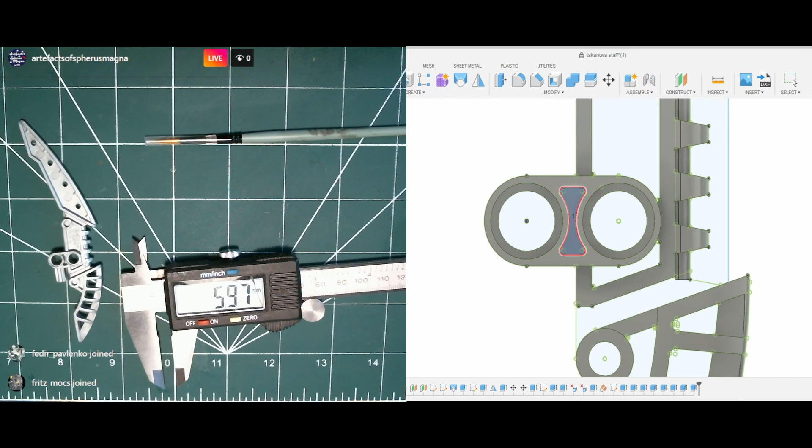Okay, so let's do the pinholes real quick. This is 7.85. 7.85. Symmetric. This is 6.15. 6.15. Symmetric. And the last one is 1.15. 1.15. Oh. Yeah, that's definitely not correct.

That's why you want to keep looking at your part from different angles, because there are some mistakes that you might not see from only one certain angle. Okay, I'm pretty sure that all those sections, this one, this one, this one, this one, and even the centers of the circles are on the same level. They look like this, and even if there's a small difference between them, it doesn't really matter. But even when I look at them from a side, I can see that they are all at the same angle. So I'm not going to bother to check.

So let's just quickly clean this up. Yes, it looks like that. The other side also. It won't work like this because we have another face here, so we need to get rid of those two. Nice. Let's export real quick.

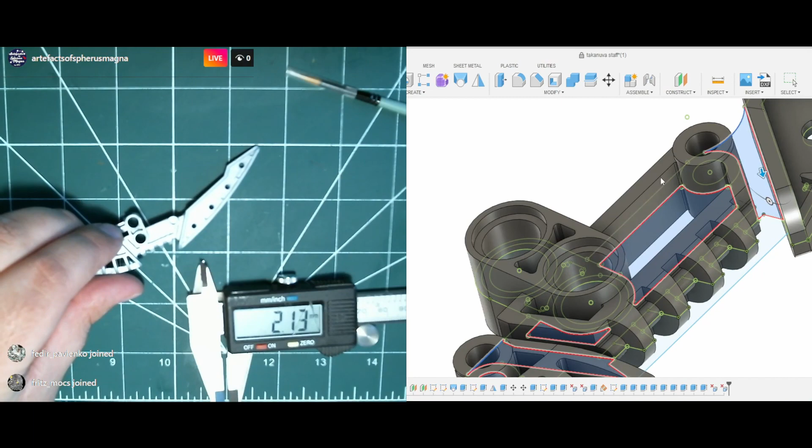Okay, and the last thing to do, almost the last, those sections. So again, we want to extrude them. That's pretty self-explanatory, pretty easy. But again, the way we want to check this distance is pretty tricky. Fortunately, we have this pretty big area here that we can again check like this, and we can extrude to this wall and subtract the distance between them. But suppose we wouldn't have this big area here. If we would only have these little tiny places in some other part in which we can't reliably fit the blade of the caliper, what would you do then?

There is a method I kind of came up with for this that I want to share with you. You need a thin, rigid, hard object that can fit in those places. Ideally, you would have a little ground rod that's very stiff, that's hardened. That's the most important part. But realistically, you can use something like a sewing needle. The sharp tip here is pretty disadvantageous. You would ideally want to have a flat surface here, so you can grind off the tip, but you can even use a needle with a sharp tip.

The first thing you want to do, no, my batteries keep dying.

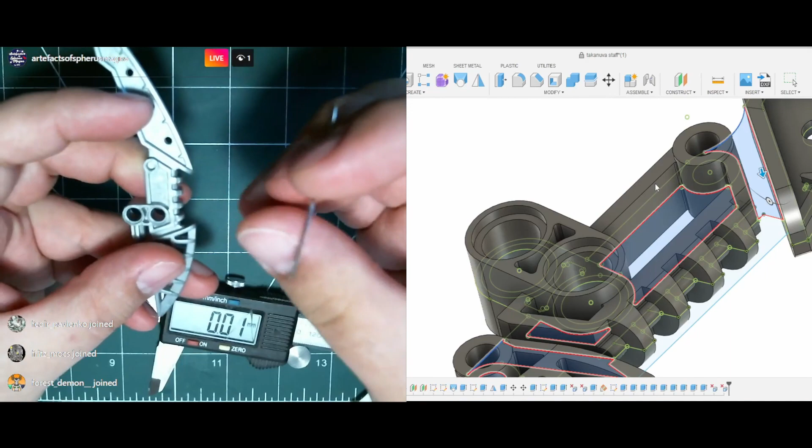So now we can take the needle. This is why you don't want the sharp point here, because if you put it at a part and you squeeze it with calipers very hard, you can penetrate the part and you change the dimension. That's why you want a flat plane here. But what you can do, you can flip it around with the blunt end to the part. The needle won't penetrate the hardened steel of the calipers, so it works fine.

And what you want to do is put the needle on the face from which you take the dimension. I don't know if you will be able to see this, but I use the needle as the blade of the caliper. So I rest the needle on one of the planes I want to measure, and now I rest the blade of the calipers on the other face I want to measure, and I rest the calipers on the edge of the needle while keeping everything parallel and straight. And with a dimension taken like that, you can see that dimension is 1.98, so around 2 millimeters. It's a very good method that you can use to reach all those hard places.

And remember, the most important thing is that the object you are using is stiff, that it doesn't bend. Needles are hardened, so they are very good for that. And if you want to make a measuring needle that you will be using regularly and you want it to be reliable, you ideally would want to grind off the sharp tip and make sure that both ends are as parallel as you can. The best way would be to clamp it in some machining tooling and precision grind the tips, but again, for this kind of work, it's not really necessary.

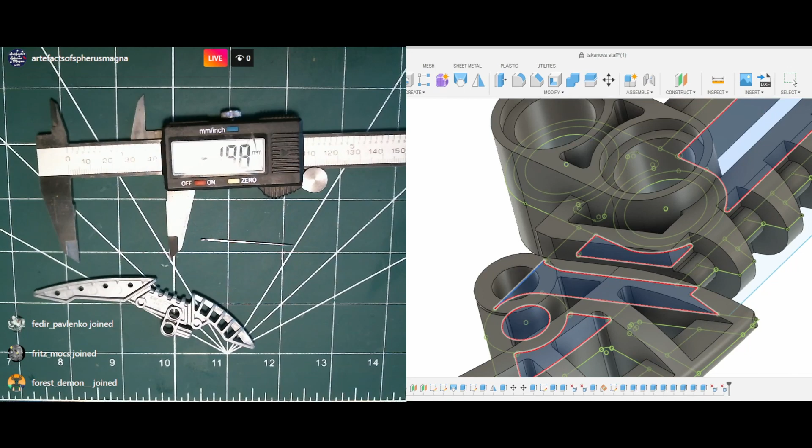So now we know the distance between our face and this face, because I rested my end of the calipers, this point, on here. I could have also used this face, then the dimension would be different, and I know that we want to go below this face 2 millimeters. What? Oh, we have some problems here. Okay, we will address this in a moment.

Okay, and we want to, as always, do this symmetrically, like that. Okay, let's double check. From here to here, 2 millimeters. The other side, here to here, 2 millimeters. Perfect. Oh, it did generate.

I think it changed when I clicked symmetric. It couldn't generate before it was symmetric. No idea why, but it's good that it works now. How do they meet here?

Oh, wait. Yes. So this actually like that. And now we will be able to delete this. Yes, this is how it looks actually. Okay, so we don't need to actually go back. Everything generated very nicely. Now all our loose bodies.

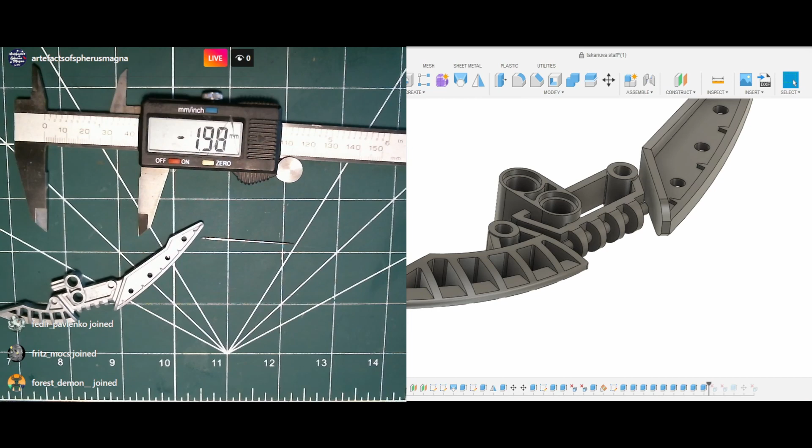Oh no, not all. What? What happened here? Why they are? What the hell happened here? Okay, so now we have 3 bodies. That's okay. Now we still have 3 bodies. Okay. So what's the problem here? That's weird. But yeah, that's what we wanted. 1 body. So no idea what happened there.

I think I'm running pretty low on memory. I can feel the laptop getting pretty hot with the modeling software, with the streaming software. I'm recording simultaneously, so it's no wonder that the computer, well, it gets lost sometimes. It has some problems sometimes.

No wonder. Okay, so last one thing to do is to add a base right here for the axle and the axle itself. So we can move the pin away. Okay, as the axle is a precision, what do you call it? Precision feature of this part, I actually will be using my standard dimensions, so I won't be taking any more dimensions.

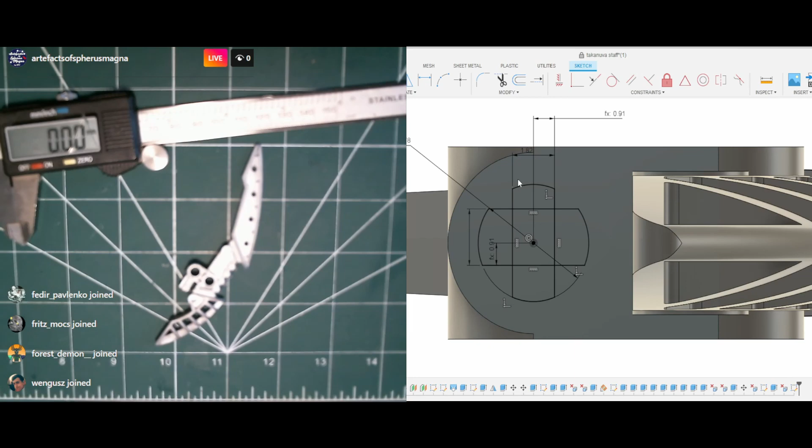What's the problem here? Oh. And the dimension? Okay. Happy. Finish. Extrude. This. Dimension is 7.75. Okay.

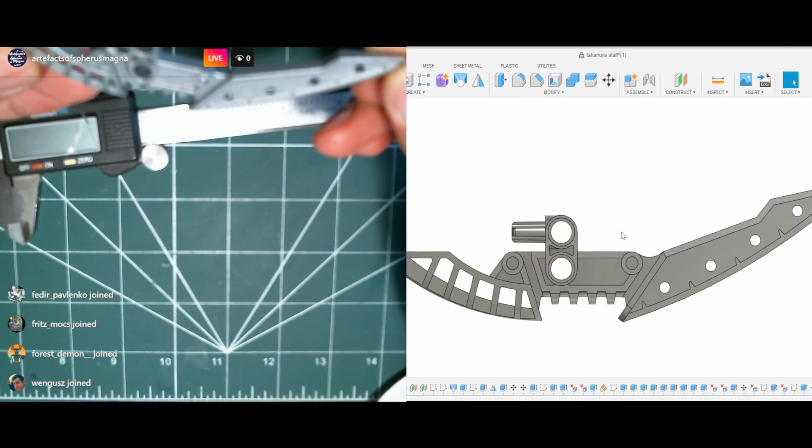Let's see. Did we miss something? Oh, we did. We're not supposed to have a hole here. Okay, so this is one thing. Let's keep checking. Did we miss something? Everything looks great here. Looks great here. Like this. Okay. Oh, what happened here? That's why you need to check your part from all the angles, from every side. Make sure everything is okay, nothing weird.

Very nice. Really happy with how this part turned out.